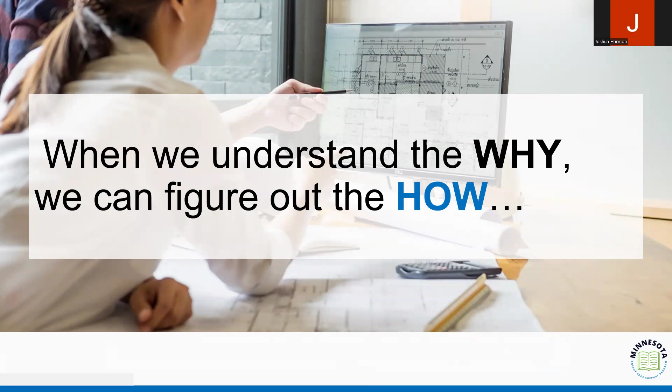But we'll go ahead and get started. And I always start off with this concept that if we understand the why we do something, we can better figure out the how. I think it's important to remember why we have building codes, and that's to provide basic uniform expectations about how buildings are built in the state, so that things aren't built differently in rural areas than in more urban areas. It also creates consistency in the expectations among our building professionals and our architects, right? If we know we have to build a certain way consistently across the state, it makes it easier for us than if we have to go jurisdiction by jurisdiction and make those changes to our plans and our processes.

When we think about what the energy code is, it's that component that helps us to address the concept of controlling heat loss, right? We're controlling the amount of energy utilized in maintaining a temperature that's designed for our buildings. We'll talk about that more as we get through this conversation. But we know that energy really in and of itself, it's not the insulation, it's the mechanical systems and the lighting systems where we start to see energy savings and those controls that we place on them.

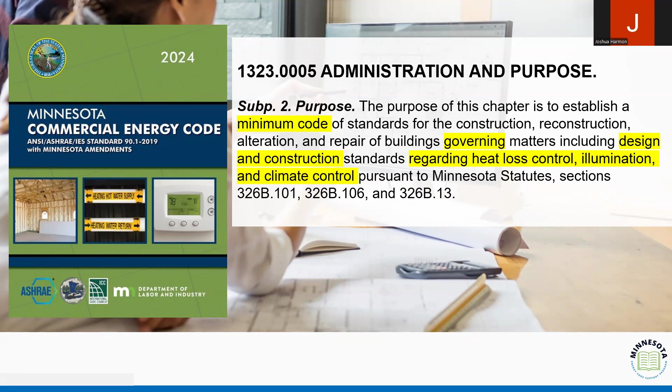But when we think about the mechanical code, or not mechanical, my brain's on mechanical right now. When we talk about the energy code as a concept, it applies, as the code tells us, in new buildings, in additions, new equipment, new systems, alterations, changes of occupancy, right? We talk about its role even in some types of historic or existing buildings. We really start to see how the code is utilized in these different areas.

Move this over here and put that, get some screen moving there for a second.

So that's really the scope, right? The energy code is one of those concepts that's really kind of everywhere we look around, when we think about modern construction today and moving forward for the foreseeable future.

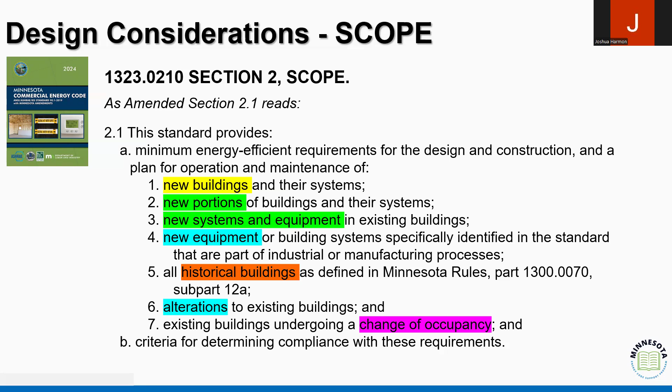When we think about how that energy code is laid out, remember, every chapter within the commercial energy code has its own specific focus. When we think about chapters 5, 6, 7, 8, 9, and 10, we think about them in different systems, right? I call them the 4 pillars. Chapter 5 is on the building thermal envelope, 6 is on mechanical, 7 is on service water heating, 8 is on power, 9 is on lighting, 10 is on other equipment.

But within those different chapters, the ASHRAE standard is broken down so that we know what to expect when looking at them, right? So there's a level of pre-organization or consistency in it. We know that where the second number in that code section is a .4, we're talking about one of the mandatory requirements of the code. When we think about prescriptive or alternative compliance paths, that's when we talk about the .5, .6. Everything's got a .7 for what's supposed to be submitted with the packet at the beginning of the process, as well as some product information that may be required as part of a system.

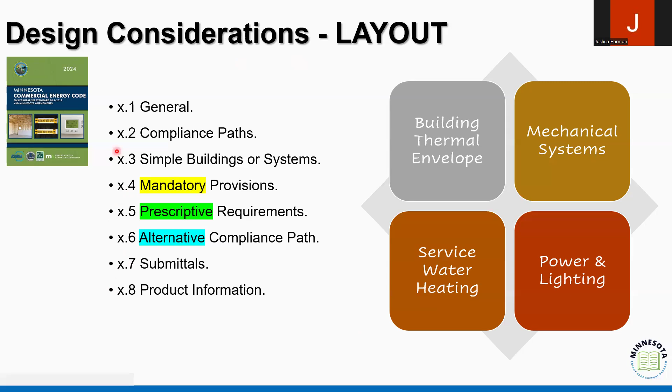And so that drives us to this conversation of what are the compliance paths. We talked about it before, and we will hit them more than once. We're actually going to be talking about them in a residential context in a couple of weeks. Really there are four options, but the three concepts when it comes to compliance paths are prescriptive, energy cost budget, which is in chapter 11, and our Appendix G performance rating process.

Prescriptive is that checklist concept, right? Give me a list of what's expected within the building envelope, the mechanical systems, the lighting controls, the mechanical controls, and I'll do it. Just tell me what to do and I'll do it. Even within that, when we think about insulation, we're given more flexibility, because just telling me to put an R30 in the wall is not enough. Somebody's going to say, I want to do a little bit different design. That's where this conversation about insulation and the thermal envelope is really about the prescriptive potential and flexibility that is there.

With those other two performance-based compliance paths, we're really calculating how much energy this building, as it's designed and installed properly, is going to cost. How much energy is it going to use over an annual year, given all the design components we're going to have? And we can talk more about that.

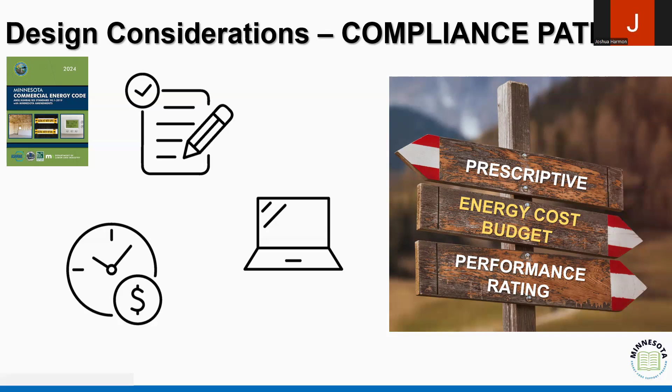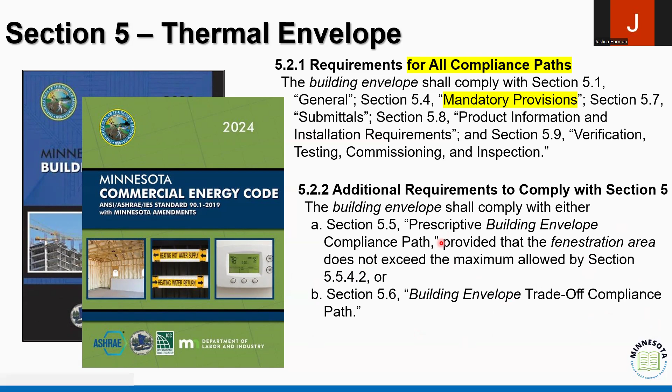There we go. We talk about the thermal envelope in the context of that baseline, that base of our building structure, right? There are certain mandatory provisions, and then there's also the prescriptive and building trade-off compliance paths. That's where we say follow the table or give me a COMcheck. We did COMcheck a couple weeks ago, and we'll do it again soon. With the envelope, there are certain mandatory expectations, but then, are we fulfilling the requirements of the table or finding some alternative where we can trade off some components to get compliance, like COMcheck?

Remember, the thermal envelope is really the system that separates the exterior environment from the interior environment, right? Here in Ohio, today is the first day it's actually snowed. It started about 2 hours ago and it's going to stop in a little bit. It's not going to stick, but we want to keep that on the outside of the building and not on the inside as much as possible.

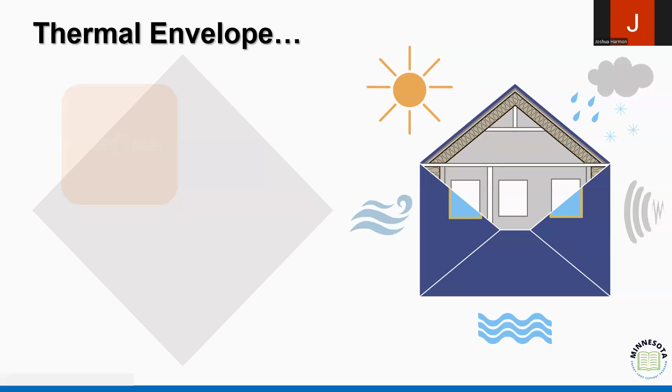So when we think about those different systems, we think about how do we define it? And then that leads us to how do we review it? How do we install it? How do we verify it? These are the four basic concepts we ask in every type of plan review or code compliance check of a building component. Where is it?

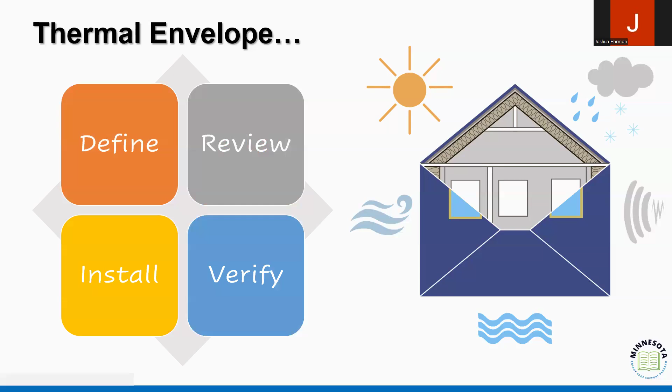How's it being designed or defined in the code? And then how am I going to review it before it goes out the door to be built out in the community? When we think about the building envelope, specifically, the state building code identifies the exterior wall envelope as those elements that provide protection from the detrimental effects of the exterior environment, right?

Again, that simple concept that the building's wall envelope protects us from the inclement weather, the rain, the snow, the heat, right? It's that building thermal envelope, the building envelope that we start to talk about here. And maybe one day when we come back on a code tag, we'll ask they throw in the word thermal just to help us even better define the building thermal envelope.

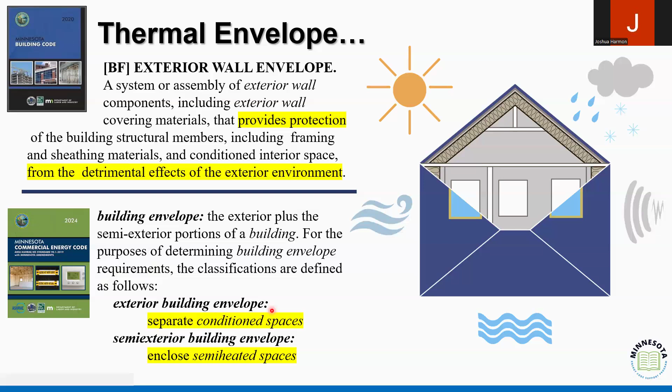It is that series of components that allow us to separate the conditioned space, whether that's conditioned or semi-heated space. And a lot of times those are the same concept, right? They're the same components that provide us the environmental separation, but also because we're typically conditioning that separated space, we see a lot of times where the wall envelope matches with our thermal envelope.

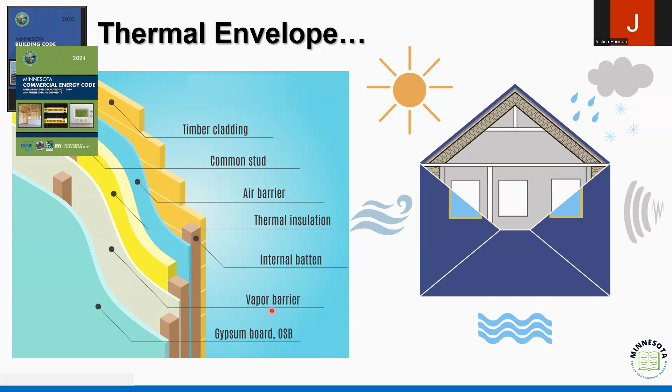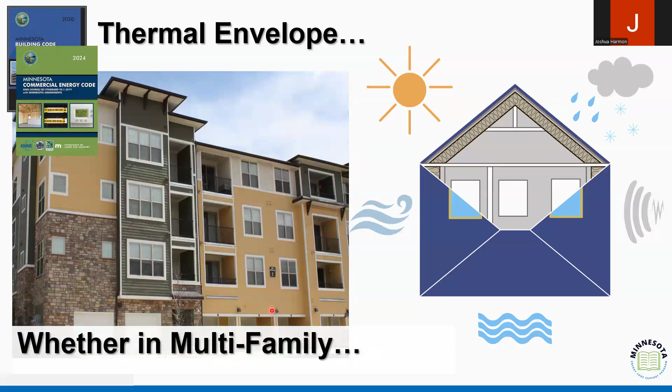There's a lot of different elements that make up those thermal envelopes. They can include things like our exterior cladding, our insulation, vapor barriers, water barriers, air barriers, thermal insulation, gypsum, or some other interior wall surface materials. And so those concepts are pretty easy for us to understand. We see them in single family construction, multifamily construction, or even, like we're talking about today, traditional commercial construction. The concept of the thermal envelope is the same across all the different types of construction.

I've used the example before. I'm sure I've likened it to the individual skin on our body, right? Every one of us has skin, and we understand that the role of the skin is to keep everything on the inside. And the same concept moves when we think about the thermal envelope. It's to keep the things that we've conditioned, that we've typically paid or spent time creating, from escaping out into the general environment.

Now, remember, the old adage that heat rises is not so much because it naturally floats up. It's because it's going from the greatest degree of temperature difference, right? And typically that's going to be the sky, out of our buildings. Right now it's 70 degrees inside and it's 32, 33 degrees outside. The heat that's inside this building is going to try to escape through the walls into the exterior environment to create that homeostasis, that equilibrium across the two systems.

We get the same thing when we think about ventilation, right? Ventilation tries to go from highest pressure to equalize to lowest pressure. Heat does the same thing, and that thermal envelope is what's going to allow us to restrict or control how that happens. And I remember we've talked about this before. If there was one word that I use to define the building codes in and of themselves, it's going to be the concept of control, right?

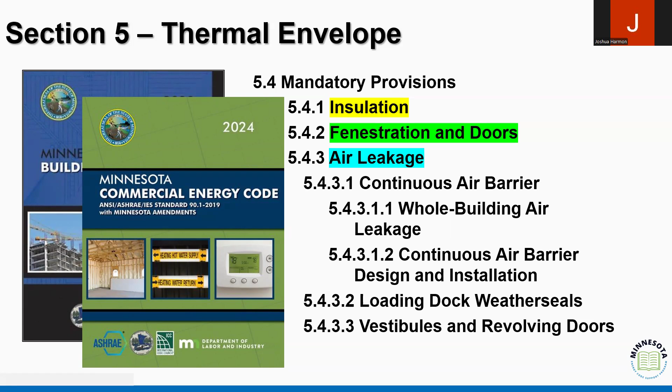If I put a fan next to the apple pie and blow it across the room, yes, it will smell delicious. Let's all be honest. It'll smell amazing. But more importantly, that pie will cool faster, not because the pie just became colder. It was that the air carried away more of that heat, right? So it's a concept that is near and dear to my heart as I sit next to all these amazing pies. We understand conductive heat versus the impact that air can have on heat loss. So I digress and need to move on.

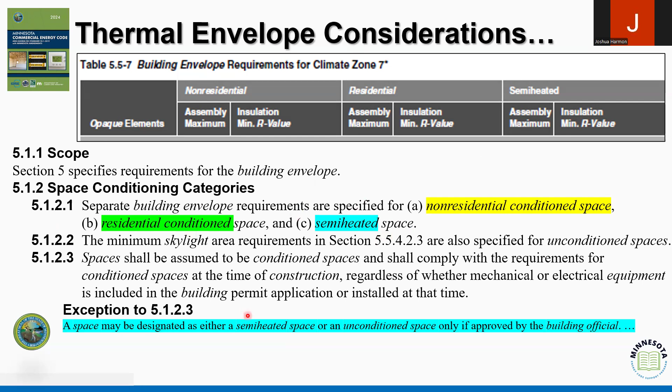But when we start talking about insulation, we know that there's certain expectations that the code provides for us. And in section 5.1, we start to talk about the recognition, the delineation, the definition of different types of space within our buildings. It reminds us that within our buildings, there are going to be conditioned, whether residential or non-residential, or semi-heated spaces. Now, it gives us the allowance that we can have unconditioned spaces where approved by the building official, and the state gives us some guidance on that through its amendment. But more importantly, we recognize that there are going to be spaces that have different expectations when it comes to how we're conditioning them. Again, semi-heated, unconditioned, and conditioned spaces.

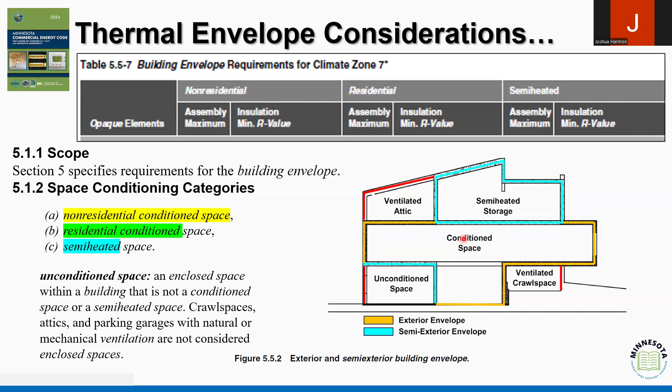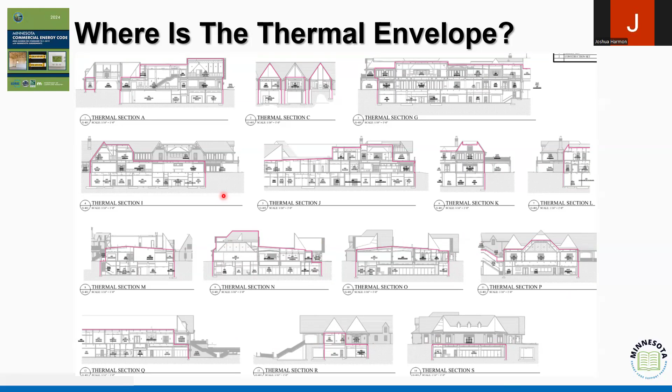And we want to make sure that we control as much of the loss as possible. So what's that going to look like? It's going to look completely different on different projects, right? This here is a set of multifamily buildings that we had. And so you can see it designated, depicted, defined, refined, however you want to use the term. I like the word depicted on this particular design. And so when they provided their drawings for this multifamily building, they provided a sheet specifically for all the elevations showing the building thermal envelope, or the building envelope.

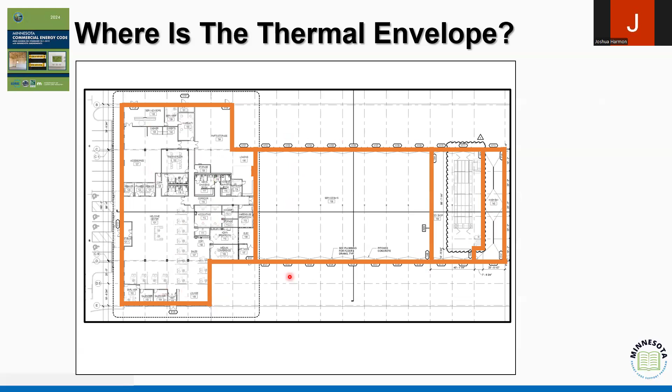Well, that's a design issue, right? The design may facilitate that conversation. But there are some designs where we are going to have designated areas. This here is, I think, some type of a car lot facility, right? So you've got the office space, which is obviously going to be heated. Then we've got these open bays, and you can see all the doors associated with them. Well, guess what? That's not always going to be conditioned. It might be semi-heated, right? It may have specific zoning heating, or it may have some type of warming systems. But again, it's going to have a different expectation when it comes to the heating capacities of those two spaces.

And so we want to create a good separation, right? So that we understand that we're going to have some things that go in here. And we'll talk about those loading doors and the impacts on them when we get to that part of the conversation. And then we have a spray booth, and then we have a wash bay, right? Now this is an interior occupiable space, but again, it's a semi-heated space versus this paint booth where they were actually trying to condition it, right? They were trying to maintain it at a different expectation because of what activities were going on inside it in comparison to this work area. So it's important to understand and to designate those different thermal barriers between the different types of space. That kind of makes sense? Okay.

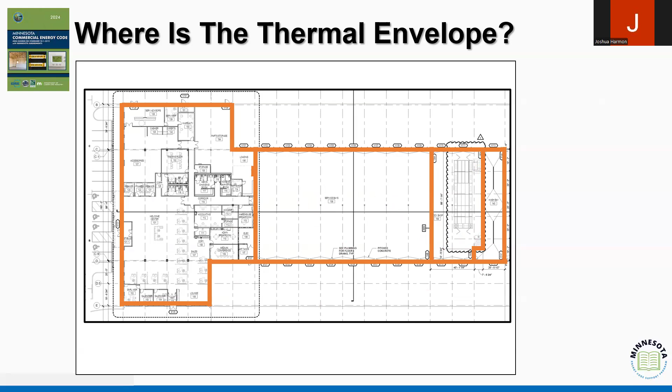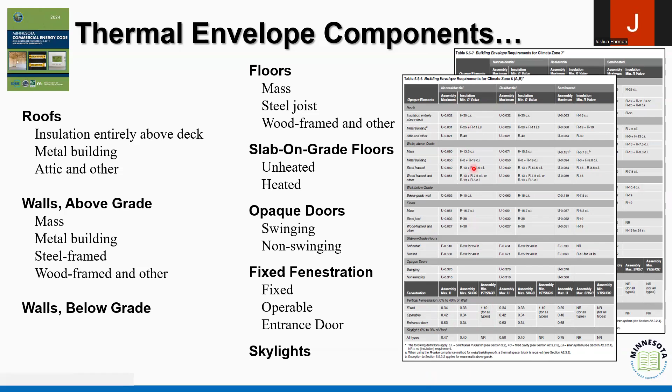When we think about the components that make up our thermal envelope, obviously we've seen those identified for us in the tables in section 5, right? We start to think about the roofs, the walls, both above grade and below grade, and then our floors, our slab on grades, our opaque doors, our fenestrations. Again, remembering that not only do we have insulation, but in that wall system there's probably going to be doors and windows. And so the code provides us in one single table those specific values for fixed, operable, or entrance doors for our residential, non-residential, and semi-heated spaces, right? So we've seen this table before. We've become familiar with the expectations associated with those systems.

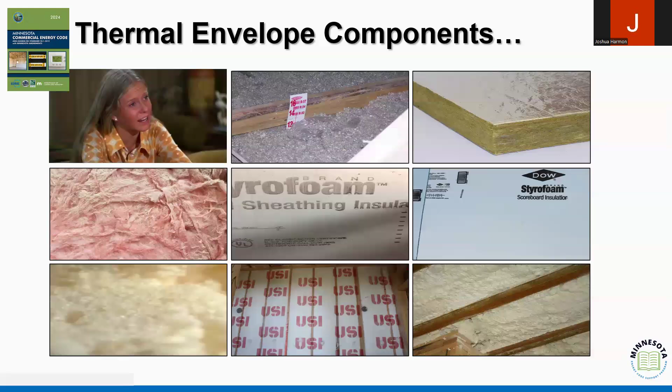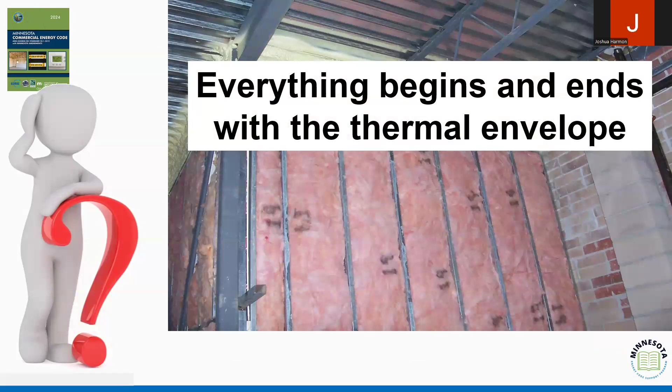Now, remember, when we start talking about the variety of materials that are available, it's all about insulation, right? Just like Jan used to always say about Marcia, it's always about insulation. But in reality, while everything begins and ends with the thermal envelope and with insulation, it can't work by insulation alone. Because like we said, having that warm pie with that nice, amazing crust on top is not going to stop the heat from getting out of that apple pie. Now I'm starting to make myself hungry, right? We again understand that air has a role in the expedited loss of that heat, right? Air flows.

Heat does not get up and walk, but air does. And so when we think about it in that context, you can get a lot more air movement through an assembly, or if you think about it again, you walk by some windows and doors, you can feel the draft. It's not that the heat somehow jumps out at you. It's the air movement that we recognize first.

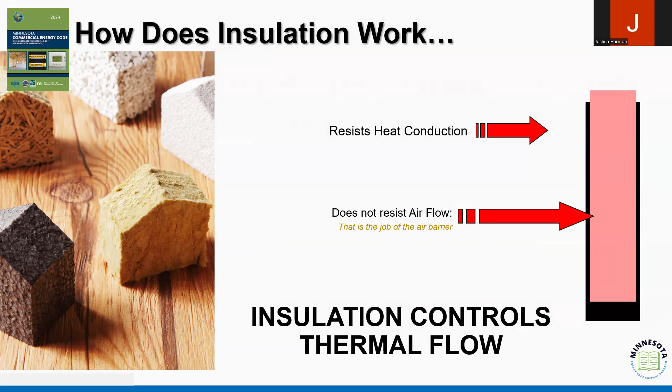And there are methods for calculating air loss and air transfer and heat transfer as a result of that, right? There are testing protocols for determining the thermal convective properties, or conductive properties of materials, right? That's where we get that concept of the R value. If we take the ASTM, I think it's C518, we take that standard, we apply it to a material, we heat both sides and see how much

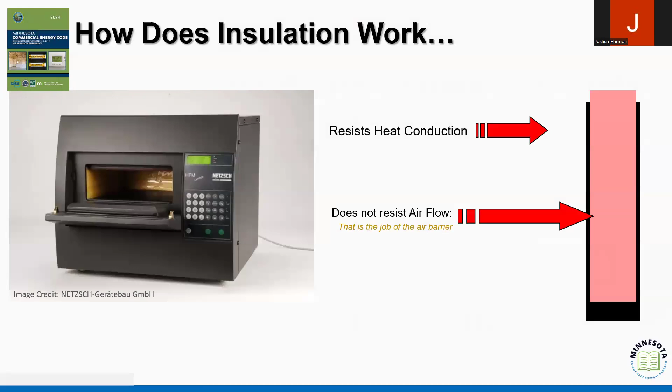of that, again, I'm thinking we put an apple pie into one of these devices, we'd be able to see how much heat is transferring from the bottom through the top, and that'll give us the R value of the pie. But it's not so much the R value, it's the U factor associated with all the different components in that system, right? We think about the box that it's in, the pan it's in, all those components working together to maintain the temperature of that piece of delicious pie for our individual buildings.

Sorry, this is the last training before Thanksgiving, so you're going to get some pie references apparently today, more than probably we usually talk about.

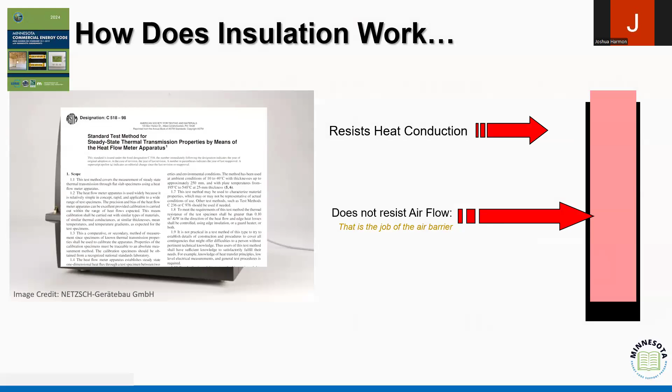But again, the code and the standards provide us this method for measuring these devices. But we have to always remember that air barriers are a critical component. They can't be that afterthought. Because again, they're going to, we call it scrub the R value, right? No matter how wonderful that thermal resistance may be, if there's air moving through it, it's going to push that air through with it.

Also air movement has other consequences when we think about vapor and water transfer, pollutants, smog, exhaust, those types of things that can influence both indoor air quality and the comfortability of our buildings. We start talking about vapor transfer, the amount of humidity that comes into a building because of a failed air barrier or vapor barriers. Then they can have deleterious or negative impacts on our building and our occupants.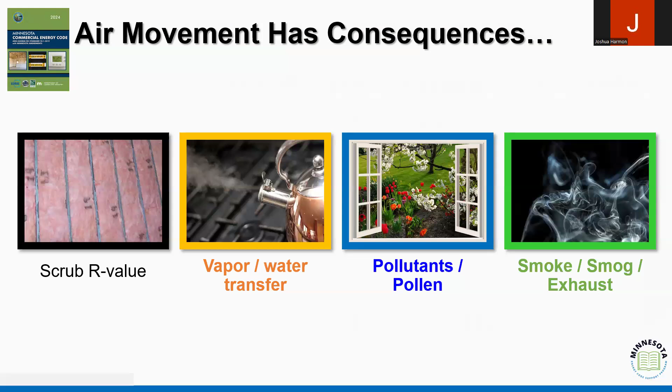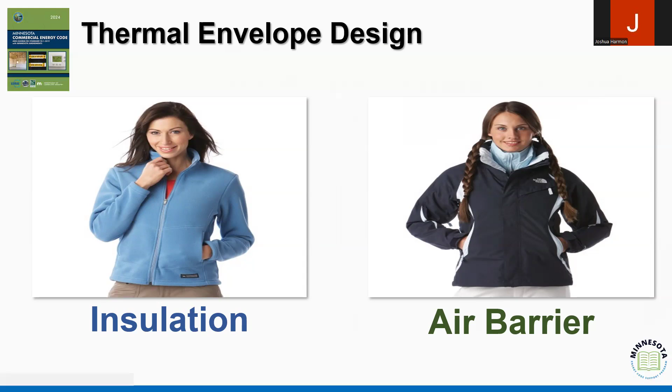And like I said, this is the perfect time of year to think about that symbiotic relationship, that of the insulated jacket and the air impermeable jacket. Today I wore a small little windbreaker, and I've got my thermal on, my sweater vest on, so I've got my insulation, but I didn't need the air barrier the entire time I drove. I only need it when I go outside at 32 degrees. When we think about it in that context, we start recognizing that not all insulations are created equally.

And to assist us in understanding the different types of insulation, this is probably a couple slides that are more specific to our design partners that are on with us today. Some of those different insulating materials may have different capacities. And just like us as building officials and architects, we have associations, so do the manufacturers of these materials. The Insulation Institute is part of that.

Let me slow down. The insulationinstitute.org is one of those associations for them to provide different product information and work through some of the different concepts as an industry for the batt insulation side of the traditional insulation. That's the North American Insulation Manufacturers Association, NAIMA.

Yes, I see a question. Is that a question? I can unmute you. Oh, let me resend it again.

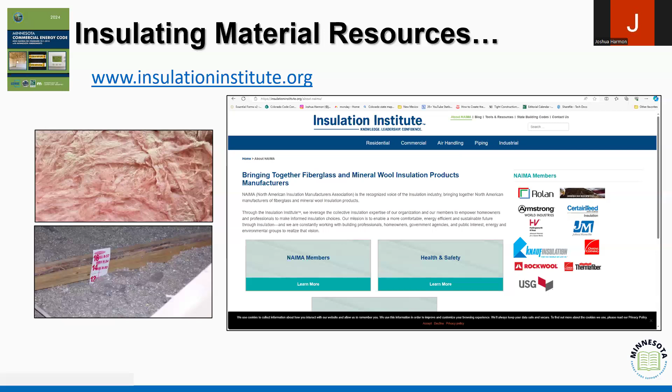Another great one is the Air Barrier Association of America. This is more of that spray foam conversation where we see materials utilized in different manners. So we can start to evaluate, especially for designers, different materials to provide both insulating capacity as well as air resistance, right? Thermal and air barriers are possible.

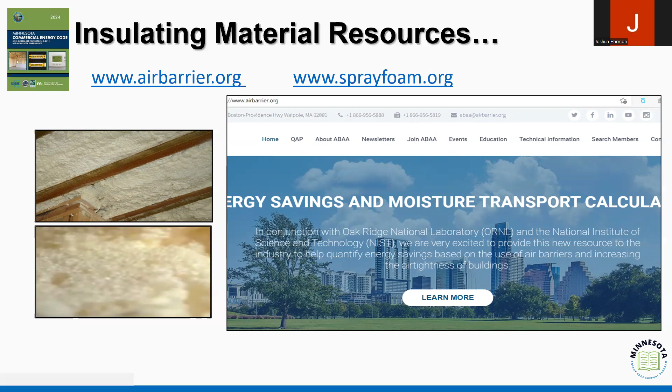A lot of times we think of them as either our spray foam or our continuous insulation, which is another association we see through the foam plastics applications for better building. We've got a friend of ours, Jay Crandall, who will be coming to talk to us from the American Chemistry Council about these types of products, and maybe we'll have them do a couple deeper looks into rigid insulation, because properly installed, it can provide us that air barrier capacity.

I think we talked about this a couple of times with roof systems. The installation of insulation, the overlaps and how much overlap. Those are conversations borne out through not just one industry, but it creates that commonality, right? The same thing we do. We may have some great ideas in one part of the state, and we use our association to educate and transfer that information around. Same concept, different part of our construction process.

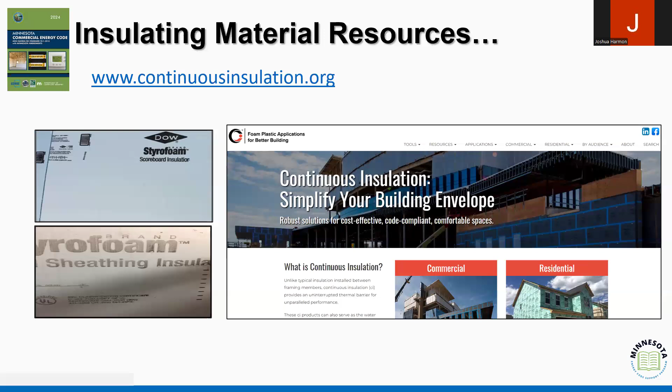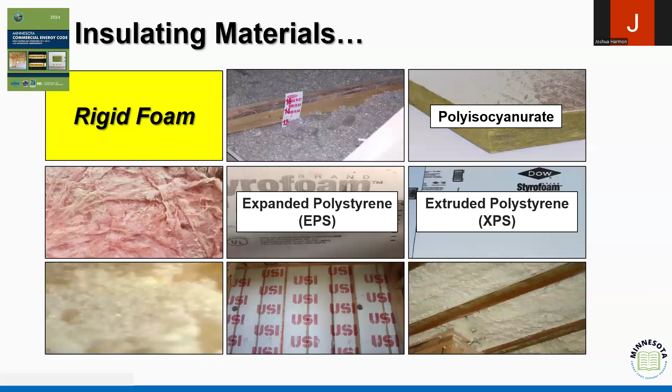So we do one more. There we go. So we start talking about some of those rigid foams and the association. That's where we start seeing the polyisos, the EPS, the XPS. Those are systems that can be utilized in different applications. Each of those systems has different R values per inch.

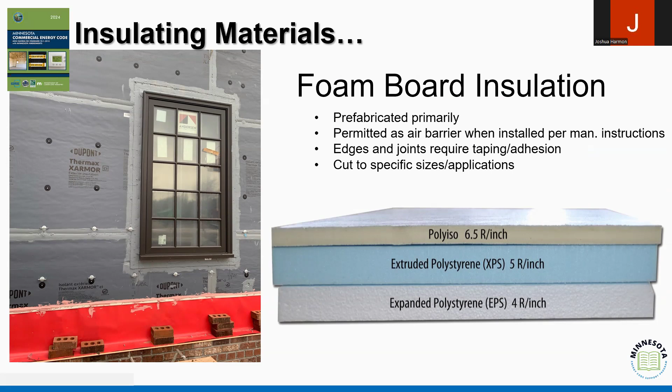When we think about installation of those types of insulation, we think about how we're going to seal those different joints, right? We want proper staggering of those joints, because those joints can actually have an impact on how we see heat transfer through a building.

And that's where we see the concept of insulated concrete panels or insulated forms. We see pre-insulated materials, zip systems, structurally insulated panels coming in, because we can standardize that process and utilize these materials for their insulating, air barrier and structural components. Trying to make a better Lego in the real world, right?

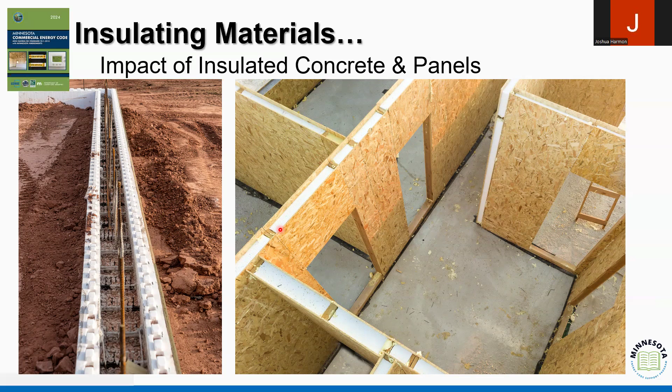These types of materials, again, like we talked about, can provide a dual role. And in 5.8, we talk about air leakage, right? And the materials that are acceptable. And in that, if we have a minimum half inch of either XPS or polyiso, but not EPS, if you notice, again, if we have specific materials at these minimum thicknesses, then we can utilize them as part of an air

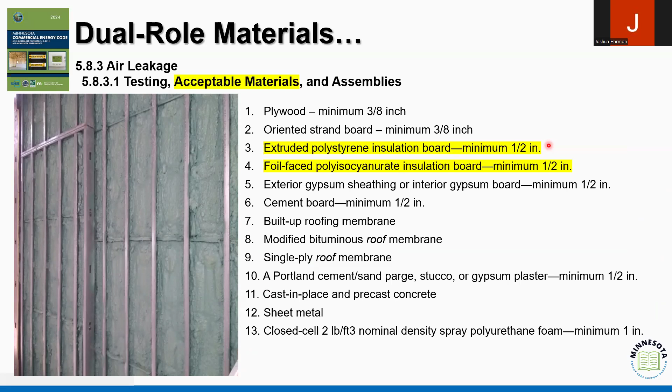impermeable system, right? If you remember, we've talked about air barriers once or twice, but if we utilize these types of materials in these locations, the science has shown that, properly installed, these materials at these thicknesses will prevent air movement, right? When properly sealed and installed properly. So again, double duty in a material.

That leads me to the concept of spray foam, right? Closed cell, open cell. I always said the only way to tell the difference is if you lick it, but that only works with stamps, right?

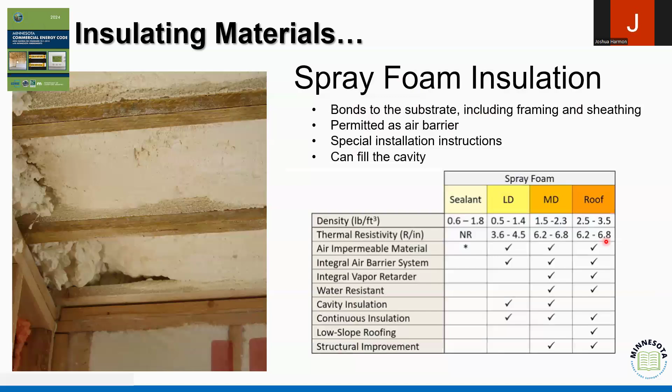Spray foam comes in a variety of different types. There's actually 4 different types. When we think about spray foam, there's the sealant that we typically see applied in different air sealants, or maybe in a fireproofing kind of can that we see walking around. Low density, which we call open cell. Medium density, we call closed cell. And roofing, which is even a thicker expectation of how it actually cures.

And so depending on the type of material we're talking about, what we're looking at is how quickly does the chemical inside the foam cure, right? If it's allowed to stay open longer, then those cells will break down, they'll open up, and then that chemical will actually escape, leaving an open cell that will be filled with air as it moves through a system, right? This is the reason why when we think about the types of insulation we use to make an air barrier, open cell needs 3.5 to 4.5.

Oh wait, sorry. Let me see if I've got it coming up. So if we look at our upcoming slide, right? Look at that again, that acceptable material used as an air barrier. If you look at the IECC, what it tells you is if you have 3.5 inches of open cell or 1 inch of closed cell, right? Then it's determined to have that air impermeability that we need to identify and utilize it as an air barrier.

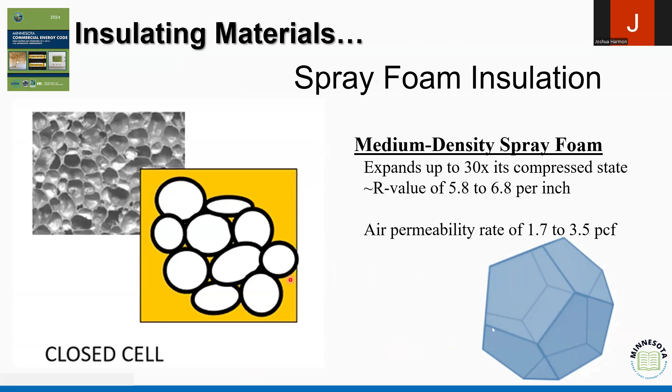Again, closed cell is going to be a different chemical makeup, and what it's going to do is cure quicker so that the interior space is filled with the chemical or the gas, right? Not with air moving in. So if it's already full, we know we can't fill it any further. That's the difference between closed cell and open cell. So again, it might be a question of asking as a designer, and understanding as an inspector or a plans examiner, what material is requested, what material is approved or in the design, and then making sure it's installed properly in the field.

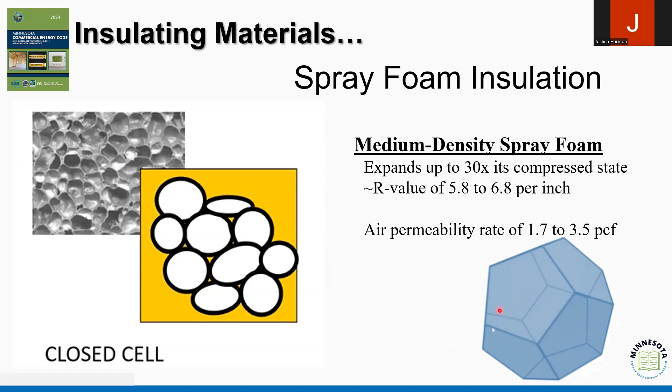Nothing would be more frustrating, at least in my opinion, than a designer has gone through and said, I want closed cell. The plans examiner recognizes closed cell is going to be used as its air barrier because it was one of the approved materials allowed to provide that air barrier. And then when we go out on the job site, they install open cell and nobody checks it, right? And so what we expected, what we designed, what we spec'd doesn't come to fruition because of simple oversights. And that's why it's important that we check everything to make sure every piece of the project

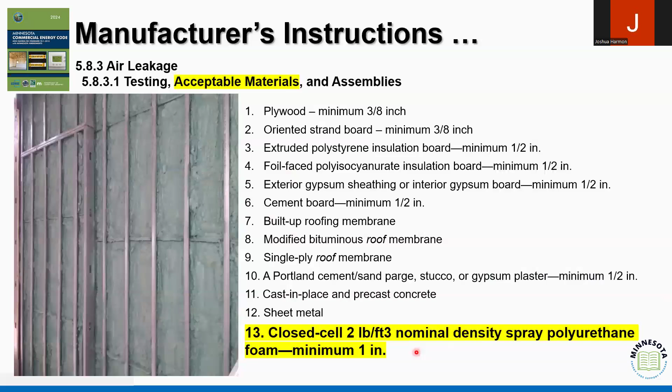flows seamlessly. Spray foam is obviously one of those resources that can be utilized not just as part of the insulation, but also to fill in some unique spaces, some unique voids, as well as in connection with other insulating materials, right? So you may have a design that calls for the installation of spray foam and then batt on top of it, right? Once it's cured, or once it's allowed to fully express all the chemicals so that we don't impact its ability to perform as desired. Again, I would defer to manufacturers' instructions or design details for that method of installation.

And again, there's some that are provided for different reasons and rationales. This one here is a picture of a ballistic round resistant spray foam being applied to a building, right? So conceptually, if you shot bullets at it, they would not penetrate because of the type of spray foam being applied.

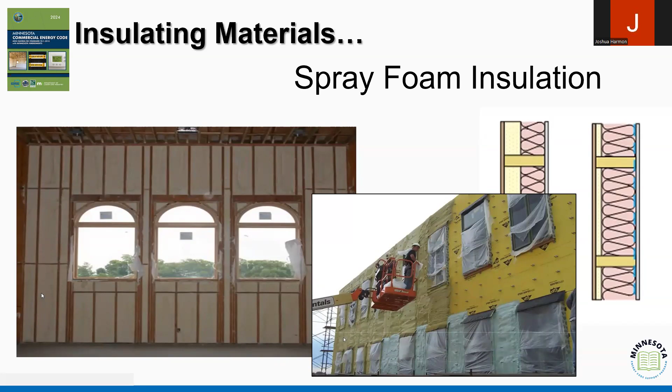So again, different materials. We know some spray foam is used for fireproofing, some spray foam is used for soundproofing, some is used for thermal. So again, it's all about understanding what the expectation of that material was, and was it designed? Was it being installed based on what the manufacturer expected it to accomplish?

Another insulation material that we think about once in a while is going to be our blown in. I got to remember to always say blown in. I used to say blow, and that caused some problems with some people in law enforcement. But we're not talking about blow. We're talking about blown in insulation.

And we generally see it as fiberglass and cellulose. And more importantly, we understand the individual material, we understand the application. We want to know how it's being applied, how we're maintaining it so that we have adequate or consistent filling across an entire space, right? Do we have baffles in order to make sure it doesn't move?

If we have raised roof systems or raised ceilings, are we controlling its movement to make sure we have that consistency, right? If we're looking for 8 inches or 10 inches, that it's consistent across the entire building and not just folded down or allowed to not saturate. But again, depending on what type of material, you're going to get different R values per inch of installation, right? Is it going to be a fiberglass insulation versus a cellulose insulation versus our vermiculite?

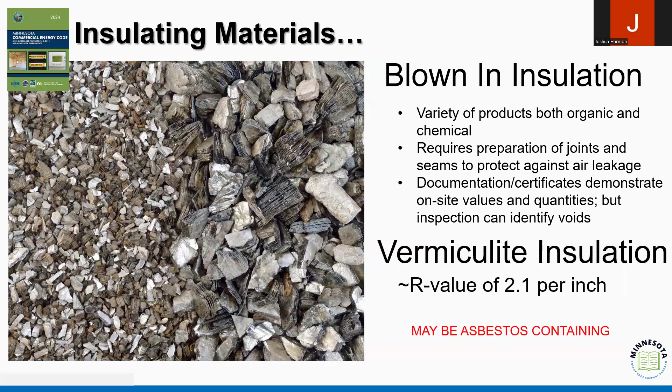I always love good vermiculite, right? It's always fun to find in bags or find it in buildings still. But again, different materials are going to come with different qualities and characteristics. Some may have more impact than others, right? So if you do find a project that prescribes vermiculite, know that it may contain asbestos. And so again, understanding how these different materials relate to one another. Not all blown in insulation is the same. Not all rigid insulation is the same. Not all spray foam is the same.

And in the same way, we talk about that with batt insulation. And nowhere is it more obvious than in batt insulation, because most of us think of batt insulation as the Pink Panther fiberglass, but in reality, it's so much more than that, right? You have rock wool and sheep's wool and mushroom and wood fiber and hemp and straw bale and denim, and those are just the ones that we see a lot of. There are different materials as well. There's newspapers, and I've heard there are people that have all kinds of weird things in their walls. And depending on what movie you watch, it could be even more fun within the walls.

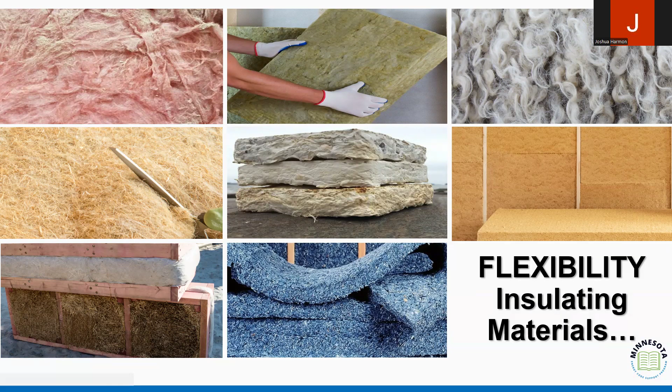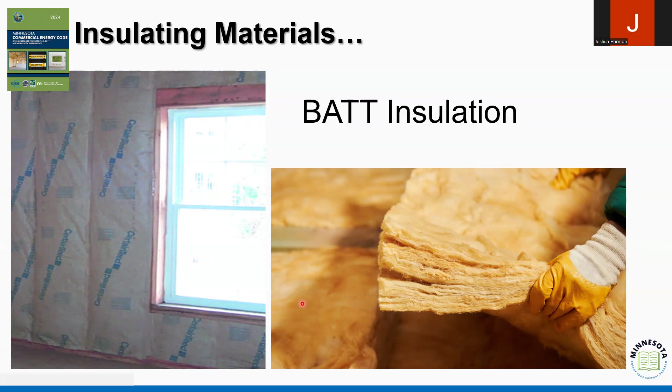But when we think about batt insulation, this is where we start talking about that concept of enclosed on all 6 sides, right? We start talking about making sure we have continuity of contact so that we have consistency in thermal resistance, right? I think we've got an example coming up here in a minute that'll show what happens when it's not consistent. But whether we're installing it in this kind of a fashion, we want to make sure it's consistently installed. It may not always be the appropriate material for some of our more unique or close installations, because you don't want to compress it, because it's that natural depth that creates that thermal resistance. And so you want to make sure that you think about them, right?

And I love it. I love the comments, right? And I think that's where you do see projects. I had a project we tore down once, and I came in. It was literally, like you said, old newspapers, which actually ended up going to our historic society. So that was an opportunity for that.

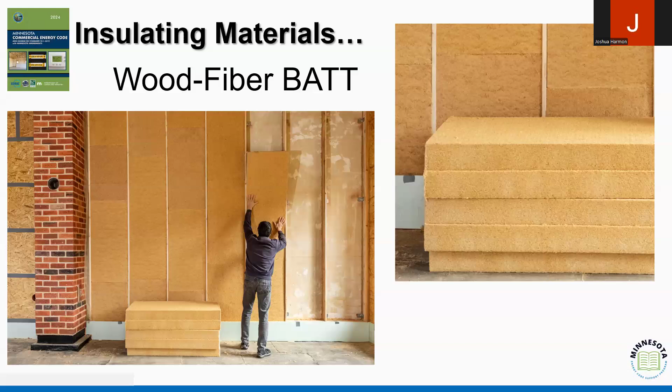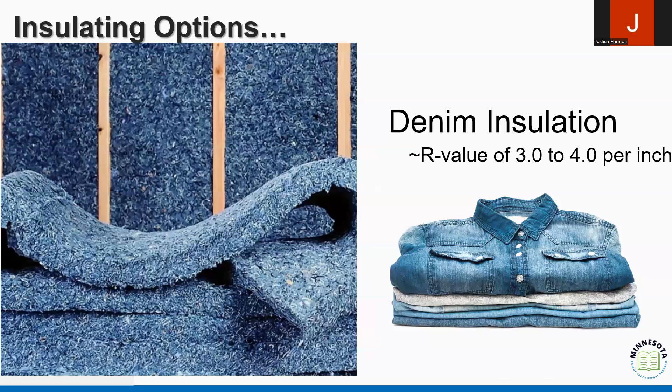So then you have the wood fiber batt, and again, like I said, there's a variety of different materials that we see utilized, from hemp to straw bale. When I first heard of the denim, I thought that literally it was Levi jeans stuffed in a wall, until I realized it wasn't, right? But we have some of this. I've actually seen it at the Menards in our area. So again, there's different materials.

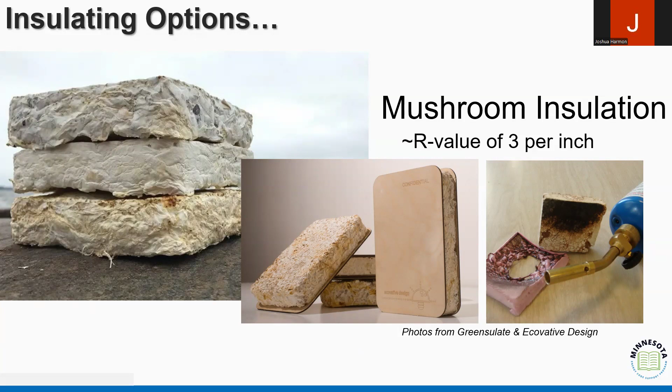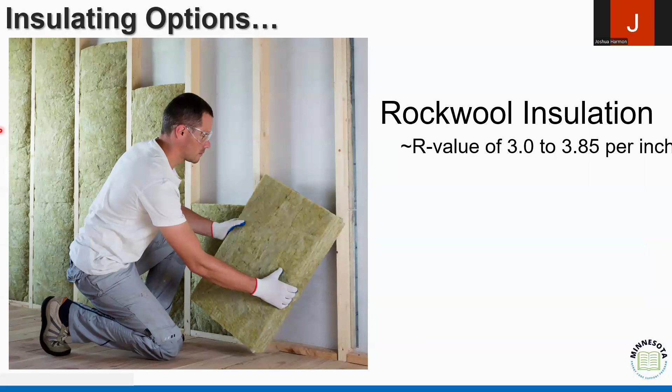And one thing Hope always likes to make the point of is, if you had mushroom insulation in your wall and you had a leak, you'd know it potentially quicker than most as it starts to sprout, right? But again, different materials like rock wool, which is different from mineral wool. Rock wool is more of that basalt, whereas mineral wool uses mineral waste. So there's different classifications of materials that we see identified in the code.

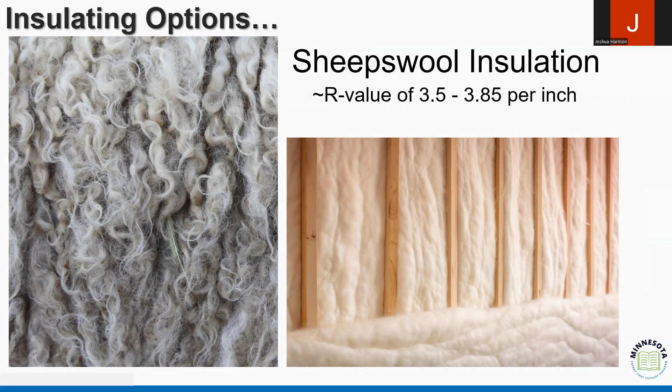Sheep's wool, another example of a natural material: it works for sheep, so it must be great, right? But it has some pretty significant R values per inch. And it looks lovely to lay in. But when we start to think about these concepts, remember, we have to define it, we have to review it, and then we provide.

I don't know what just happened there. Do this, right?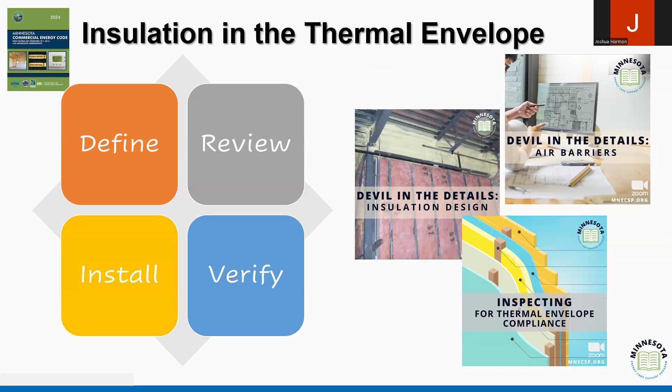So we've had some conversations about these in the past. It's one of those things that we talk about a lot in energy code compliance, because it's not the thing that uses energy. We don't have plugs plugged into the wall insulation, but it is that wrap that isolates and maintains the conditioned space so that those energy consuming components operate more effectively, right? And there's a variety of resources and videos we've put together to help out with that.

Let me see how many slides we got. Oh, we got enough.

Slight deviations in the design of a building can have significant impacts on how it complies with the code, right? In this example we're looking at climate zone 7, I think. In a non-residential setting, we have minimum expectations of R value and maximum expectations for U factors. In our example, we've got a simple wood frame wall, and prescriptively we provide two different options, the U factor and the R value.

And so we see that we start to add in some cavity and continuous insulation under that minimum expectation. But we can modify some of that cavity and trade off some of the different materials. So if we want less continuous, more cavity, we can get to that same expectation when it comes to the U factor. That's really what we're getting at here, right?

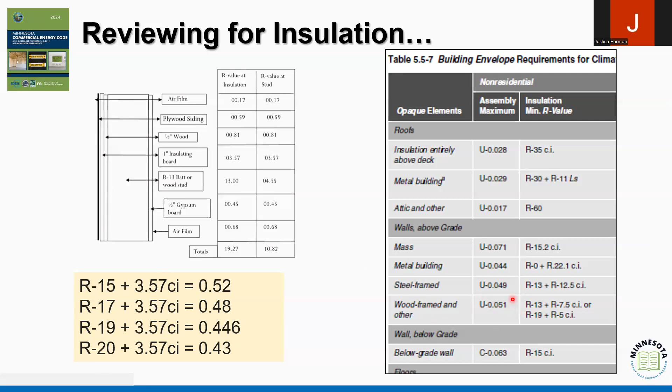That's where it's important, when we're reviewing a project, to identify what components are designated in what location, because sometimes we have thermal separation, and then things that are more sound separation. So we look at a project and pull out the insulation schedule. The reason this one was changed is they gave us a nice insulation schedule but provided no R values, which is kind of what's the point. When we zoom in, we see some blown-in insulation in roof systems, and some batt insulation.

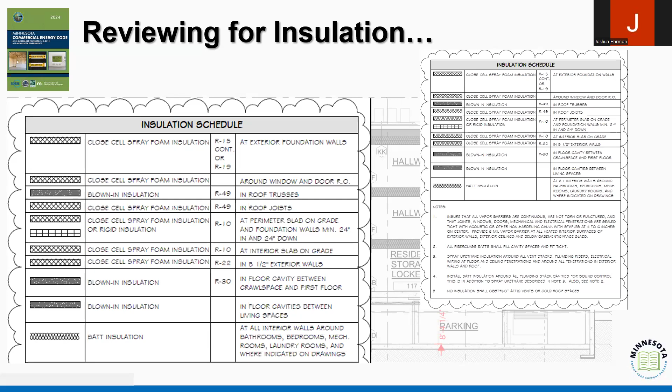We start to see these symbols that represent something. And again, it's important that we understand what those symbols are calling for. And then also, how does that get installed, right? We're going to fill all the fiberglass. We're going to spray the polyurethane in certain areas, right? So we're going to make sure that we think about how they're going to be installed so that we know where it's expected to be.

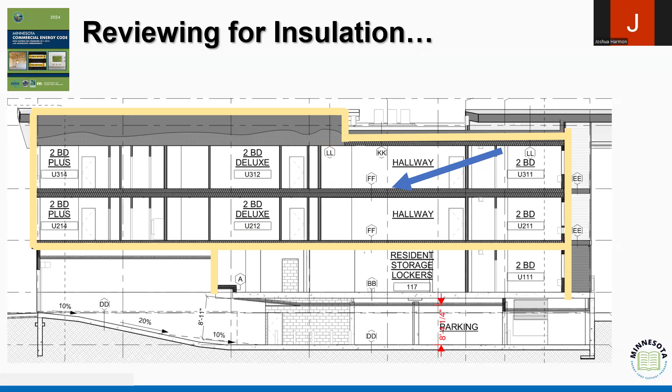And so when we see this type of drawing, this type of separation, right, at first glance, we see them identify this as my thermal envelope. Well, then we start to ask the question, well, why is this insulated, right? Is this for sound attenuation, or is this going to be part of a separation between multiple units, right? So those become questions that we need to figure out and start to draw out.

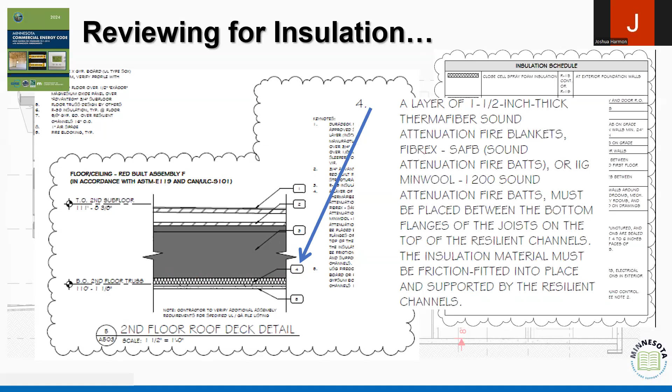We see here the identification of sound attenuation batts, right? So what they were intending in that second floor roof deck detail is they start to explain to us that we're looking for a 1.5 inch sound blanket, right? Material there on number 4, right? And so again, we start to identify them, we start to understand how they're being used, because it's the question of why is it, and then we can figure out the how it gets installed. And it gets into the whole what.

This one I always love to point out because it just drives me crazy, right? It's the mislabeling of features because we see here this is called batt insulation. We see the batt insulation symbol, but then we see it called out as spray foam, closed cell spray foam, right? So again, one of those things that when we think about how do they get built and how do we have consistency, these are the types of things that we identify and say, hey, if this was the only note, then we might say this is just approved as noted, right? But this was not the only note, so it was one of those.

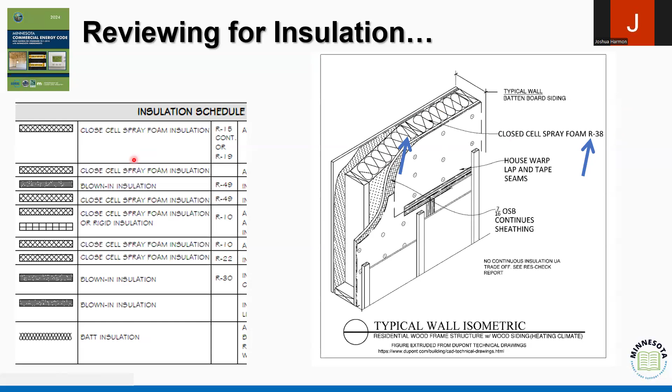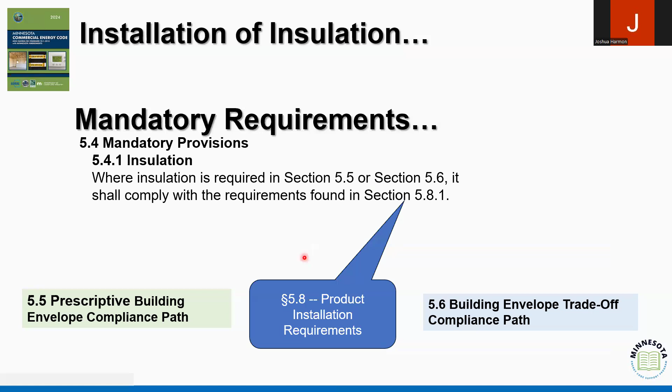Hey, please clarify whether that's going to be closed cell spray foam or if the symbol needs to be changed to reflect the appropriate symbol on page, whatever that was. Sorry, right? So again, when we start talking about that installation of insulation, we have to think about what does the code expect, right? The code gives us some examples, both in the mandatory requirements, the prescriptive, and the trade-off, but also gives us the product installation requirements in 5.8. That's when we start to get into how are they properly installed, right?

Are they going to be pushed in, bunched up, and leave these voids that we see exist? Or are we going to have areas where we're going to have incongruities between, we called for a certain depth of insulation, but now we installed spray foam here and back here to get to that same level. Is that going to be consistent with what the plan was designed to provide us?

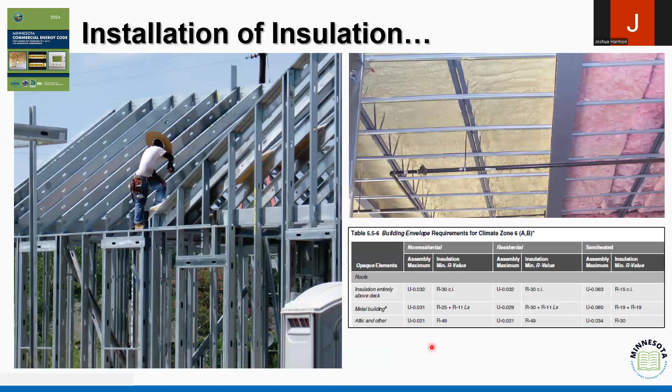And again, we start to identify, 3 inches of rigid insulation that gets us to an R15, 1.5 gets us to an R7.5, right? That gives us a total of 22.5. Whereas in this wall system, we see a 3/4 inch of rigid at 3.8 and a 5.5 insulation at R20, right? So again, we start to see that some walls are designed to operate differently.

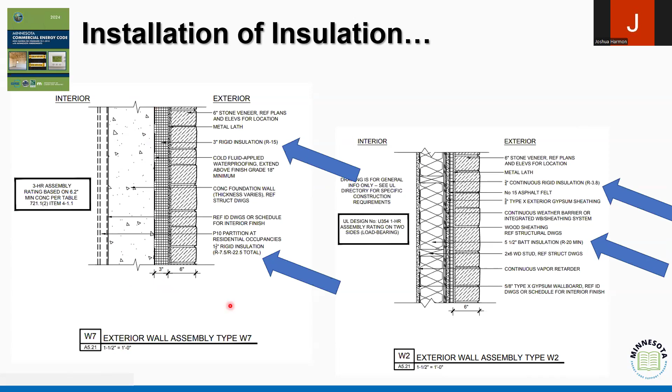And so that's where it's important for us to make sure we check all the wall details. And then when we're installing them in the field, our contractors can see what's the expectation for successful completion of a project. So again, it's all about verifying what was expected, what was going to be done in the building.

I don't know why it keeps doing that.

Thinking about, again, what do our details look like? We're supposed to have, again, different types of slopes associated with going to a roof drain. Are we looking at staggering? What are we looking at? Are we looking at an insulated covering? Or are we looking for a membrane to cover?

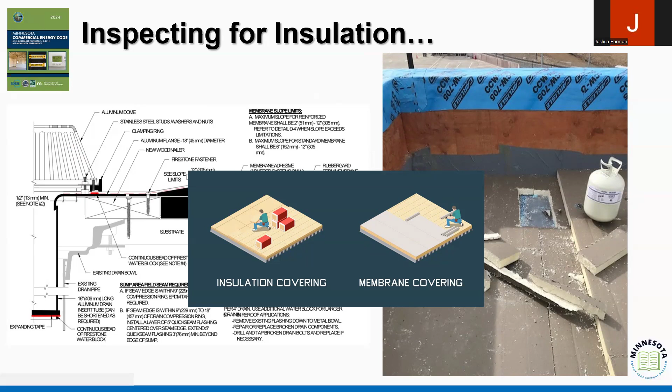It depends, there's a variety of different installation expectations. And that's where, again, it comes back to what are the details, and when we're inspecting it, making sure that as a plans examiner, I've got the details in place so that my staff, when they go out and do their inspection, can have clarity as to what they're looking at.

And sometimes, again, it's about identifying and making sure every feature is properly and adequately identified, right? We see our R19 batt, our R7.5 continuous, we've got our air barrier, we've got our thermal break associated with the materials that we see out there. We've got our DensDeck, we've got our polyiso as well, which again is outside of our actual rigid insulation that we're utilizing as part of the thermal, because again, we're going to be maybe having different materials employed in different ways.

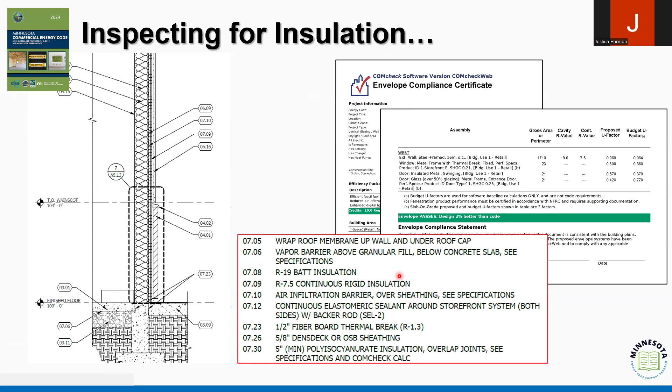And what we want to make sure is that what we see in the field matches with what we have on the paper. So again, we don't see these areas where we've got inconsistencies. I don't have it in here. I thought I had the thermal image. I took the thermal image of it showing how that gap impacts the temperature of the space, right? And the actual movement of air and heat through that wall system.